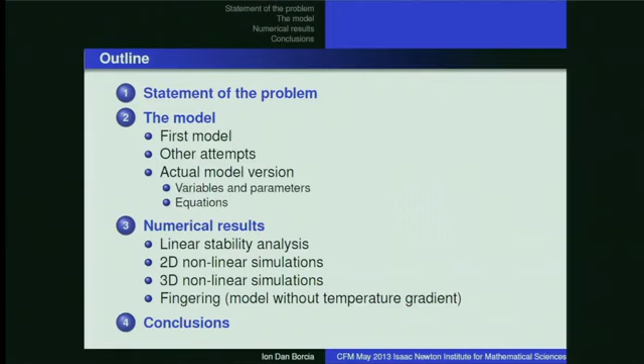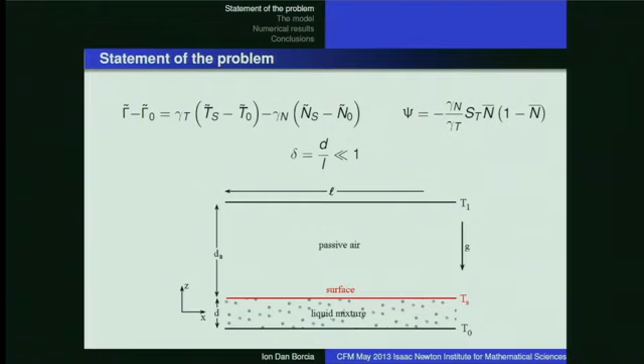Nonlinear simulation, but with the model without temperature gradient. So we have a two-layer system, heat it here and cool it here, and the surface is deformable. The first layer is a liquid mixture, and here is the passive layer, and I consider convection only in the liquid mixture.

So here we have two mechanisms. One is destabilizing, so that the surface tension gradients due to the temperature will destabilize the liquid, and if this Marangoni separation ratio has the right sign and it's strong enough, the concentration will push the liquid again in the hole here and will be a stabilizing mechanism.

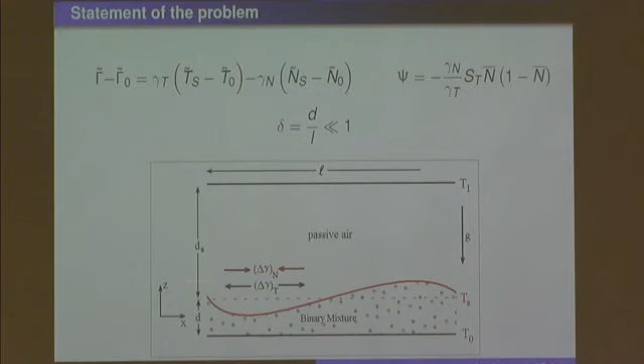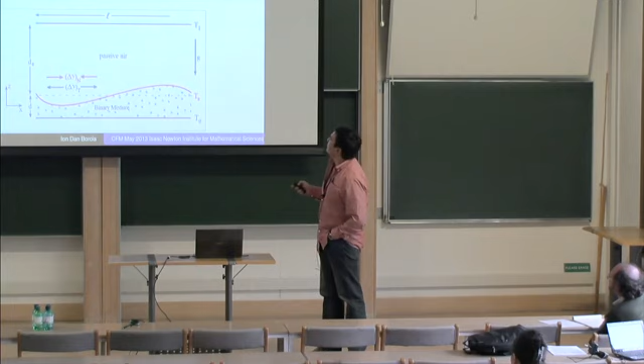And if we play with the relaxation times, we can expect also to have some oscillatory behavior because of this interplay of the two mechanisms, one stabilizing and one destabilizing. And we work under the lubrication approximation, so the dimension in the vertical direction is much smaller than the deformation on the lateral deformation.

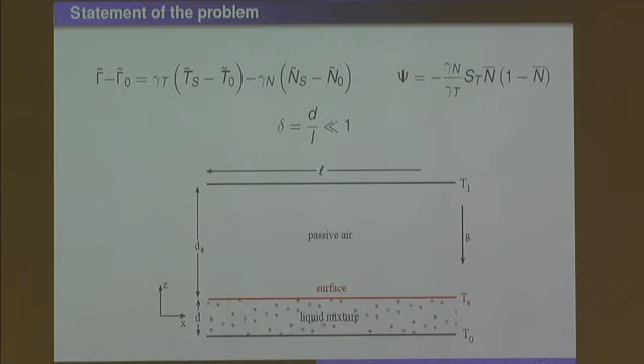We consider also gravity in our system, and the surface tension depends on both temperature and concentration.

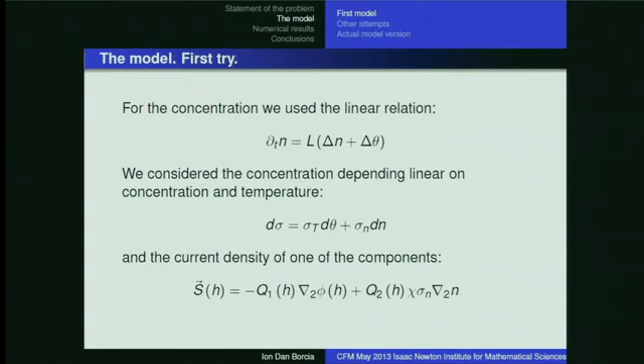For the concentration, we took the linear relation, which is written here, and we consider all the time in this simplified model that the concentration and the temperature vary linearly in the vertical direction, so the second derivative will be 0, so this operator here will be - we take only the horizontal part of this operator.

Also here it's again written that the surface tension depends on temperature and concentration, and with this condition the current density of one of the components will look like this one.

And now we want to be as simple as possible, so we take this mobility as 1 and also the temperature directly proportional with the film height, and making in place of H we work now with the new variable U, and then we come to these two very simple equations.

The first one is almost the Cahn-Hilliard equation plus an extra term for the concentration, and this is the equation for the concentration with L, the rescaled Lewis number. So it's took to be as simple as possible, the model, but still can explain some of the behavior.

So we have two control parameters, the Marangoni separation ratio and the initial film height. And then we can obtain for very small or very high initial film height, a conductive state, and depending then on the separation ratio, oscillatory or monotonic behavior. So we obtain monotonic behavior for positive Marangoni separation ratio or for small negative one.

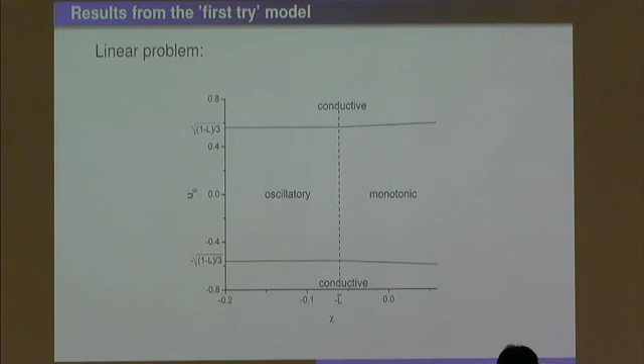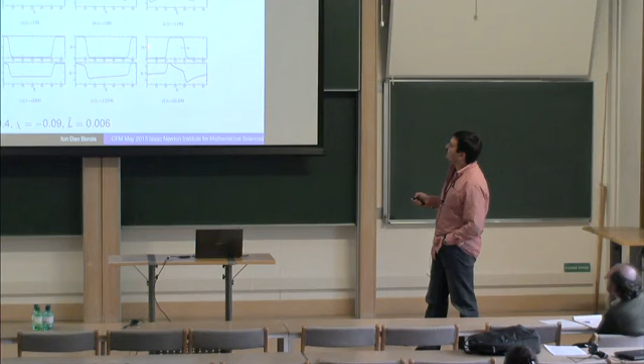In the meantime, because this height is enough negative, we have symmetry breaking, so the concentration is lower here and higher here, and this concentration profile will drive the motion of this drop.

So here I show the same in a 3D simulation, which mathematically is 2D, and we can also see if we look at the movie that the movement of this side is driven by the concentration field.

This is some intermediary state. This is after a longer time, because I chose the initial height near 0. It's hard for the system to decide to be drops or holes, so these traveling stripes will appear in the system, also from low concentration to high concentration.

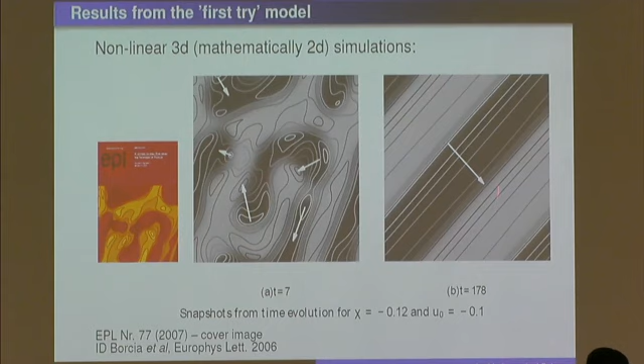Here with the line it's the concentration field, in contrast with the height. For the height, the lighter region means higher height. For contrast in the concentration, I chose lighter line for lower concentration. So this movement of the stripe will be from lower concentration to higher concentration, which means higher surface tension in this case.

So we made other tries, to see if really the profile of the concentration can be considered linear, which is a strong assumption in the first model. Also, why not take a 3D equation for the temperature, which will allow us to consider the case when the heating of the substrate is not uniform.

But in fact, the problem with these tries is that they are not consistent. So we lost the advantage of the lubrication equation, the lubrication models, which ensure that for a 3D model we have a 2D mathematical problem, and then we save a lot of time for the simulation.

So the solution was to derive the model in a systematic way, and to include the concentration equation in the frame of the lubrication approximation. Now I'll start to present the actual form of the model.

So we start from the thin film equation, which is written here, then the energy balance equation, and the equation for the concentration, which is written here.

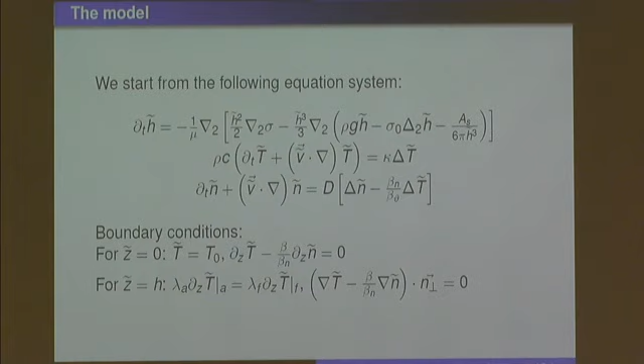The other values are in non-dimensional form. These are the non-dimensional parameters, the most important being the Marangoni number and the Marangoni separation ratio.

Also the Schmidt number appears here, and if you consider disjoining pressure in order to avoid rupture, we need also the disjoining pressure, and we have also the Hamaker constant.

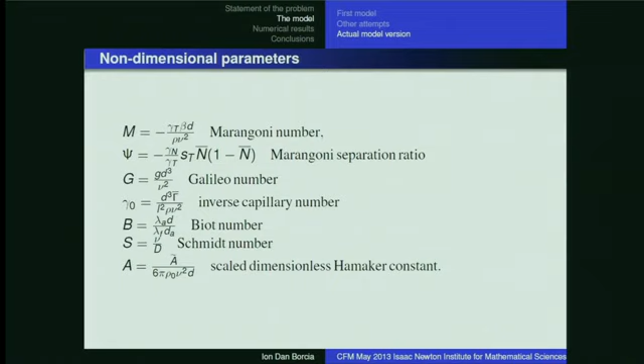I cannot present all the calculations, so I write here that we perform a systematic expansion of the basic hydrodynamic equations in the lubrication approximation.

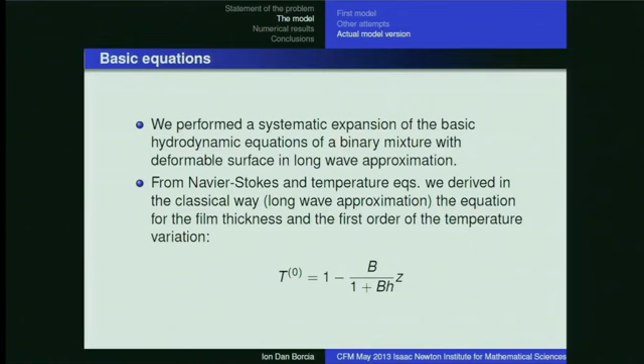We consider, in the first order, that the temperature is proportional to the height, so the vertical coordinate, and this is still standard for the lubrication approximation.

We derive an equation for the concentration, and also in the first order the concentration is proportional to the height, plus a function which will not depend on the vertical coordinate.

Then we show that we can replace this f with something which has more meaning, which will be the integral of the concentration in the vertical direction at one point.

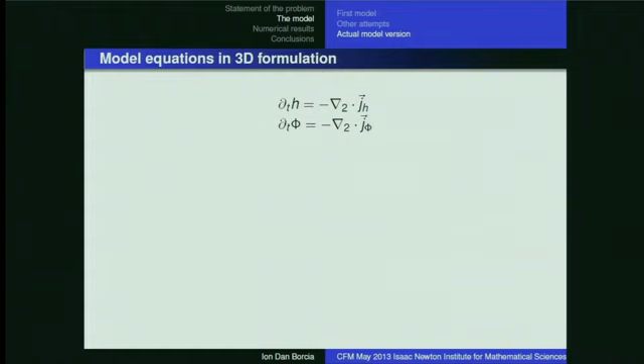And we succeed in writing the equation in the conservative form. Until now I worked only in 2D, but the model can be generalized to 3D.

So we succeed to write H and phi, which is related to the concentration, in such a form, and here I write what these fluxes mean, these two fluxes for H and for phi.

Also which is the connection between this function f and the function phi, and the pressure and the surface tension in this case. Here is the disjoining pressure, the gravity, and the term due to the surface tension and the surface curvature.

For the linear stability, we have the equilibrium values for H, height, and concentration. We take a perturbation, and then linearizing, we get such a system.

A1, B1 depend on the non-dimensional parameters, and we consider a realistic system, let's say water-isopropanol.

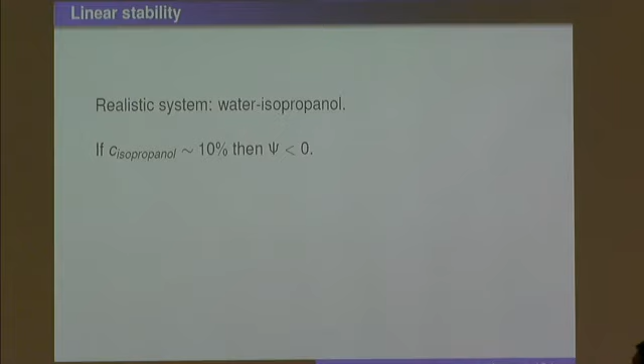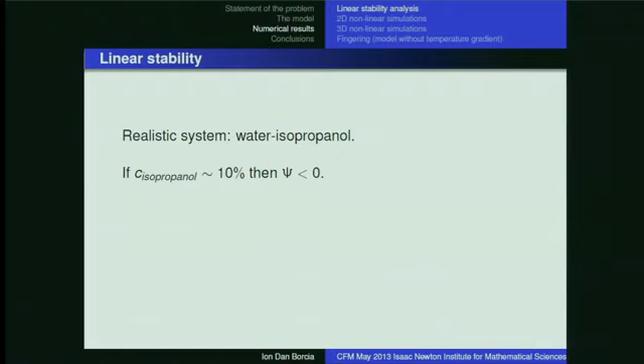So if the concentration of isopropanol is around 10%, then this Marangoni separation ratio will be negative, and we are interested in negative values in order to obtain oscillatory behavior.

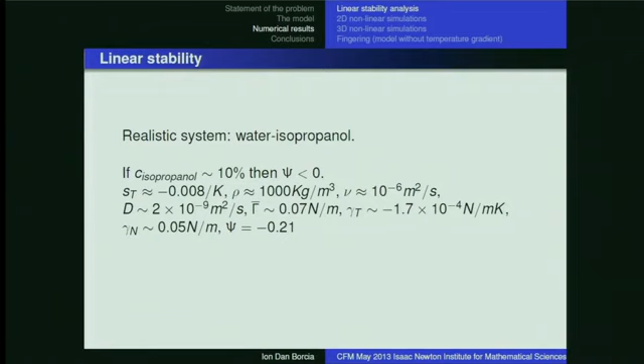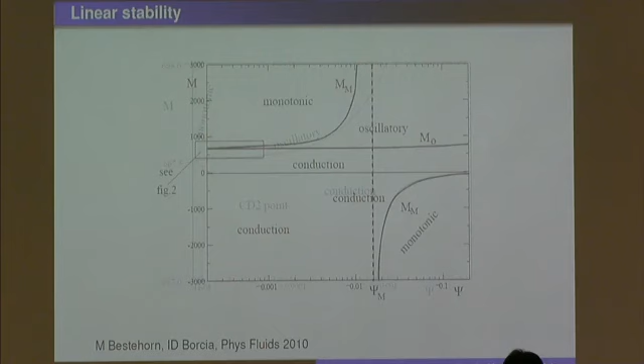Here we obtain a very small value for psi at this codimension 2 point between oscillatory and monotonic instability. So we expect firstly, from conduction, to obtain the oscillatory instability at the beginning, and then if we increase the Marangoni number, to obtain monotonic instability. So oscillatory comes into play first. This is a zoom in from the more complete diagram between the control parameters M and psi.

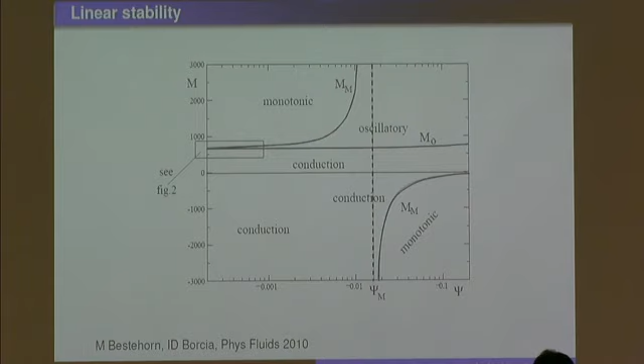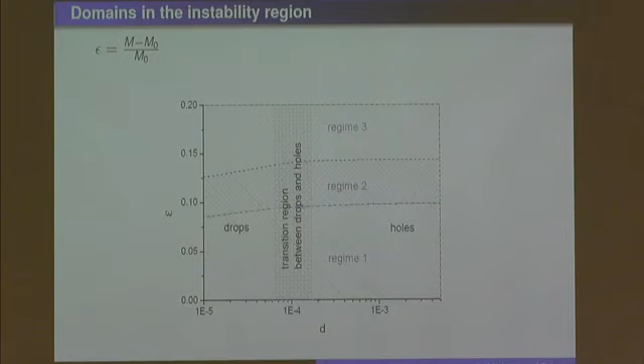So here we obtain firstly oscillatory and then monotonic instability as we increase the temperature difference. Also here, instead of Marangoni number, I use epsilon, which represents the distance from the threshold, and I also play with the film height. For small height, it's energetically favorable to obtain drops; for higher film height, to obtain holes. Here is something intermediate—there will be some stripes for not-so-high epsilon. I will present two simulations, one near the threshold and one a bit further.

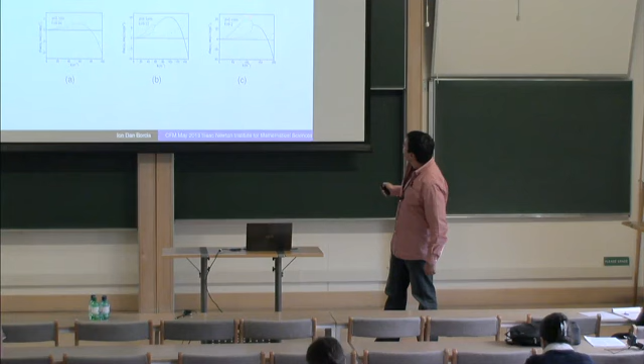Here is what regions 1 to 3 mean. Region 1 means we have only oscillatory behavior, only imaginary, so only complex lambda, with the real part positive. Here we also have a real part, but the maximum is still for the complex number. And here the maximum is on the real part, so it will be mainly monotonic, but we still have some part with complex number.

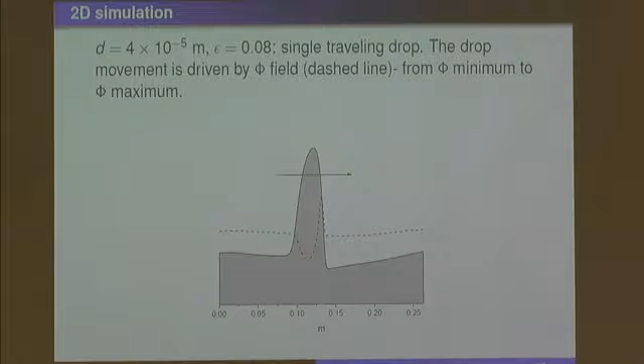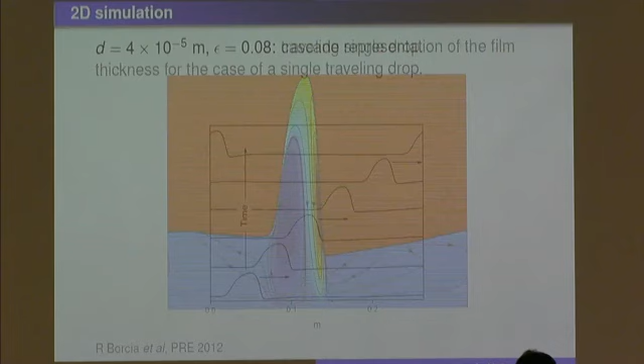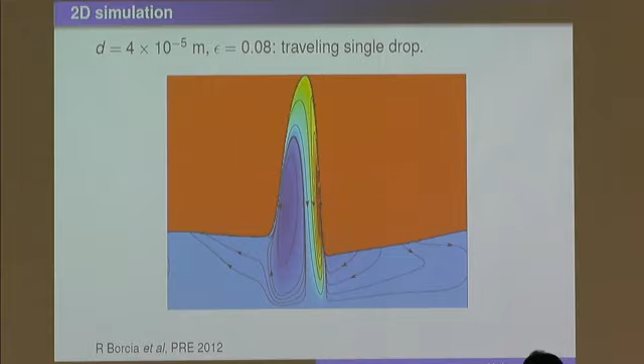So here it's a 2D simulation near the threshold, so epsilon is quite small. We can see that, like in the simplified model, the movement of the drop is driven by the concentration. Here higher concentration corresponds, in both the old model and the new model, to higher surface tension, and here lower surface tension—this difference drives the movement. These are different times showing how the elevation evolves. I also plotted the streamlines, the velocity field, and we can see that the liquid is tucked here; this elevation will decrease more in the front and grow here—this is the mechanism. Here we have higher surface tension, here lower surface tension due to the concentration gradient, and this rolling of the liquid maintains the difference: higher concentration here, lower concentration there, and this is the mechanism that pushes the drop.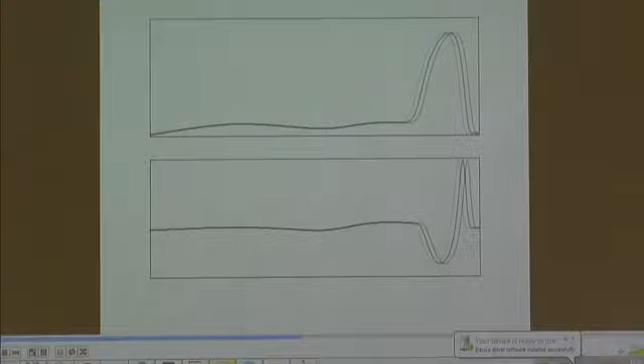You can also see the animation of this. I increased the speed to make it faster since I don't have too much time. You can also see the concentration field on the lower part, and the film height on the upper side.

Also, the question is how the velocity of the drop varies depending on the separation ratio, and we find that for a higher negative separation ratio we obtain a higher velocity of the droplet.

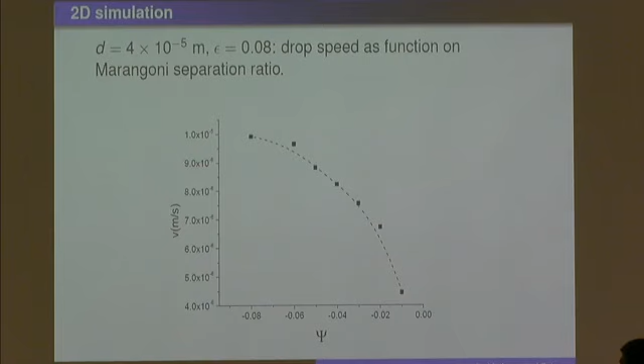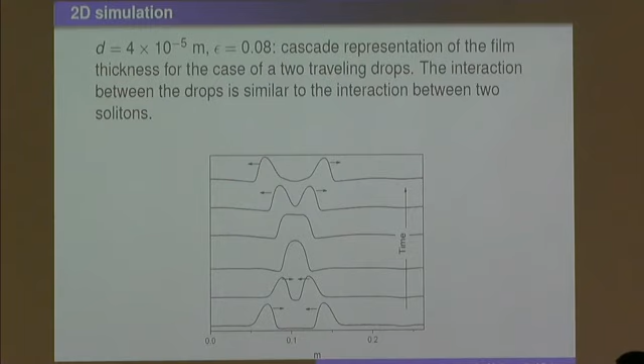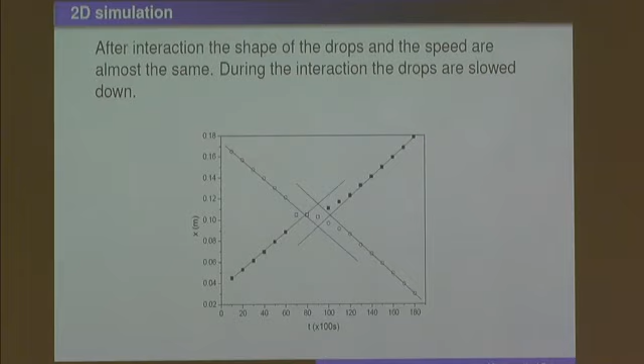Now consider the case where we choose random initial conditions such that at one moment two elevations of the same magnitude appear in the system and move toward each other. Such a system can arise, and these two elevations will merge into one single drop, then split again into two drops with the same shape as the initial drops. If you look at the velocity, it will be the same here, smaller here, and then again, after the nonlinear interaction, the drop will move with almost the same velocity.

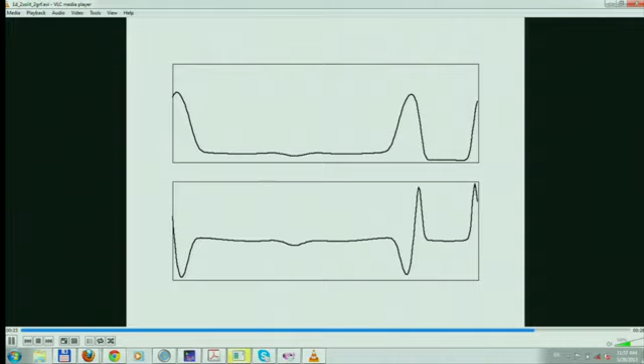And here is the animation—let me take a moment. You can see that if the drops are almost the same magnitude, it will take a long time until one drop wins.

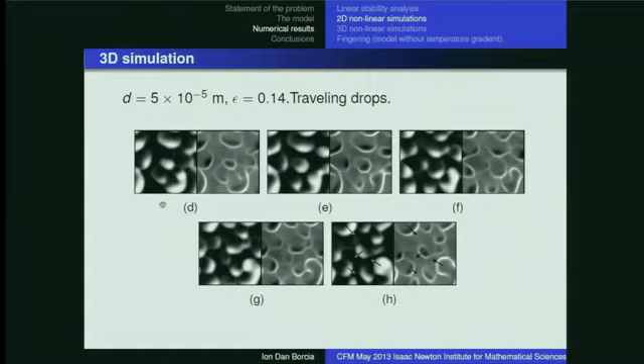This is also a 3D simulation, somewhat away from the threshold. The system behaves very tumultuously, let's say, and the movement of the drops is again driven by the concentration. On the left side is the height, and here is the concentration. If you look at the movement of the drops, you see it's driven by the concentration field—wherever there's a white line in a given direction, that will be the drop's movement direction.

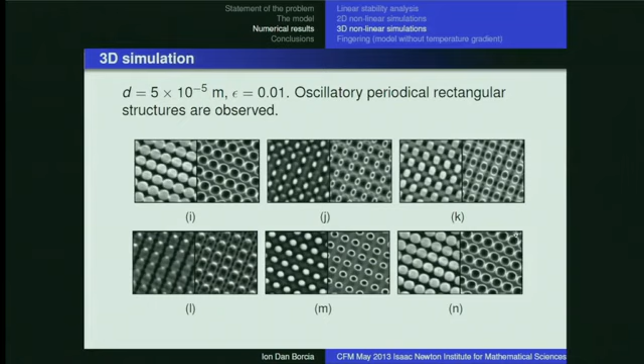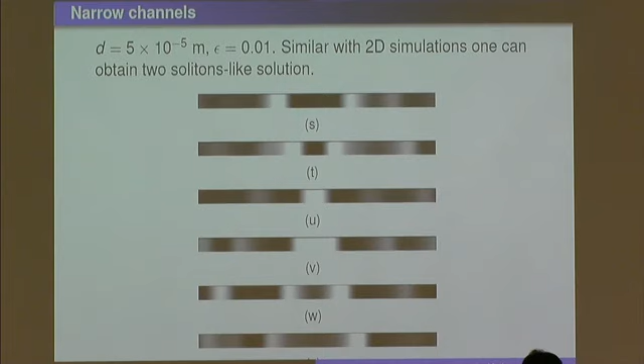We also did a simulation for the same parameters, but for one-dimensional narrow channels, where we take no-flux conditions on the lateral boundary and periodic boundary conditions on the horizontal direction. You obtain the movement of the elevation like in 1D, and also the case when we have two elevations, they meet each other and then split again. So the same behavior also appears in these narrow channels.

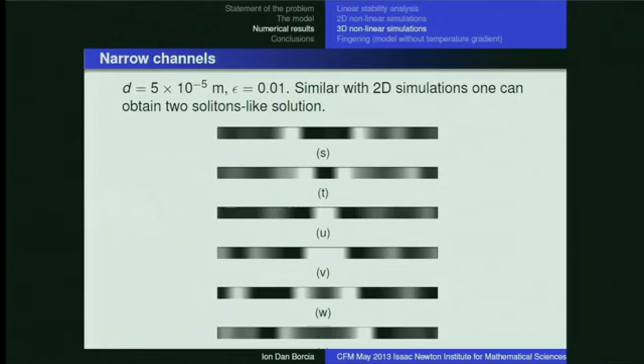Finally, I'll present a case made with a slightly simplified model, without the temperature gradient, and the initial state has separate components. So here will be one component, here will be another component, and some fingering appears in the system.

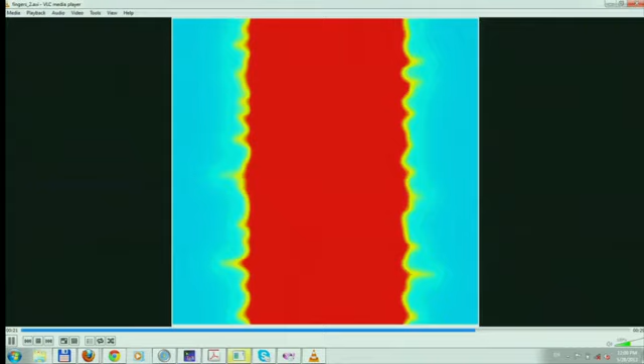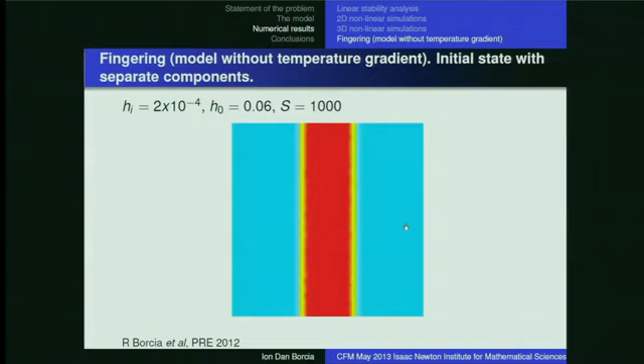This fingering is maintained by the difference in concentration. If we have higher diffusion, which is the case here, the fingering will be less pronounced. But if we increase S, meaning lower diffusion, then the concentration gradients are higher, and the fingering phenomenon becomes a bit more pronounced in this picture.

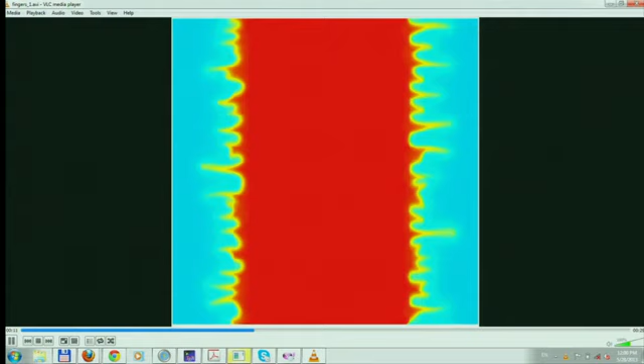I'm finished with my time, so I'll go to the conclusion. We derived the equation for a binary mixture in the long wave approximation. For the thickness and temperature, we used a standard method. What is new is this equation for the concentration at order delta squared. Then we performed linear analysis and nonlinear simulation, which I already presented to you. Thank you for your attention.

Questions? Let's see the energy functional again, in the first or second slide.

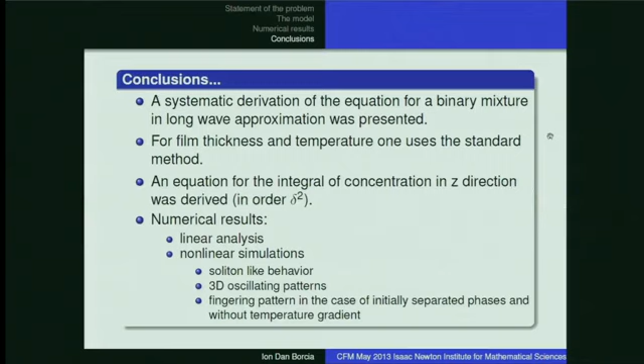Yes, this is more to see how we choose it. But in principle, the model is a lot simplified. Here it also appears sigma, which with a proper non-adimensionalization can be chosen as 1, and epsilon here—it should be gradient, not rotation, yes. And so what is the rationale behind this polynomial?

It's only to keep it simple, a double well function where the left corresponds to the disjoining pressure. So this first model is in fact very, very simple, and we tried to keep it that simple. This is only to show a little bit why we chose it this way. So finally we also took Q1, Q2, the mobility is 1, and everything is as basic as possible.

The expansion is about the wetting transition. Yeah. This epsilon is related to the distance from the threshold also. But yes, in fact you should look directly here to see that it's actually similar to our model, but very, very simplified compared to the actual model. Still, with this simplified model we can capture a lot of the behavior we obtained with the more complete and systematic model.